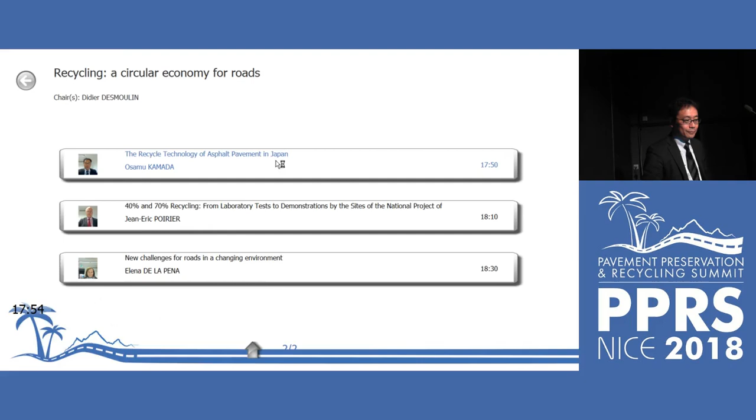Thank you, Mr. Chairman. I'll be talking about recycled technology of asphalt pavement in Japan.

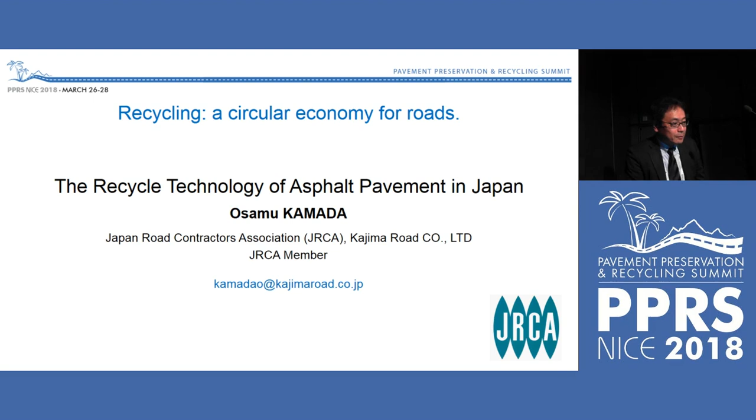In this presentation, as introduction, I'm going to talk about the state of Japanese asphalt pavement recycled technology. I will then show you the represented asphalt plants in Japan, then a mix design method of recycled asphalt mixture that is established and generally used in Japan, then recycled materials of base course. Finally, I'll give a brief conclusion and future work.

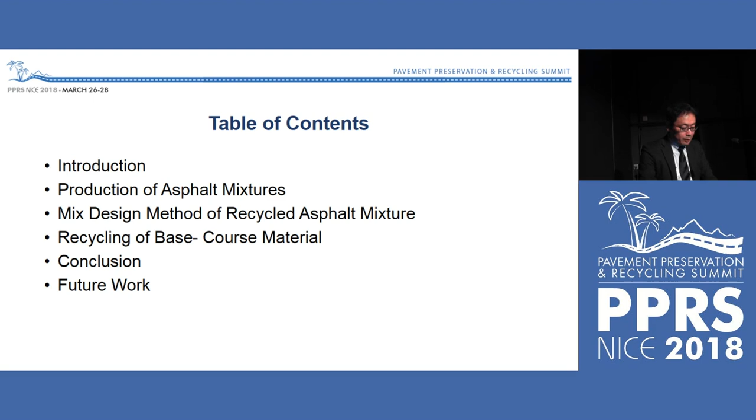First, let me mention the current situation of today's Japanese asphalt pavement recycled technology. The recycle ratio of asphalt mixture reached 99.5% in 2012. In the past, waste asphalt mixtures were often used as base course materials. At present, the mixing ratio of RAP used for dense graded asphalt mixture has increased. More than 60% of waste asphalt mixtures are used for asphalt mixtures containing RAP.

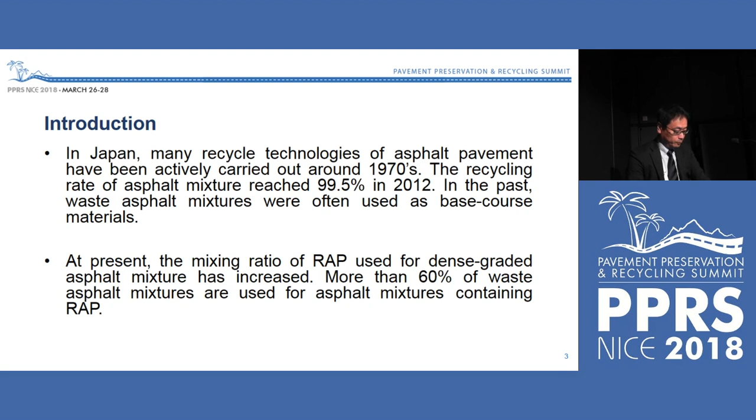What you see here is the production of virgin and recycled asphalt mixture in recent years in Japan. You can see the ratio of recycled mixtures to the total proportion of asphalt mixtures has been increasing. The ratio was only 14% in 1992, but it exceeded 50% in 1998, and reached 76% in 2016. The recycled asphalt mixture has already been used as a general mixture in Japan.

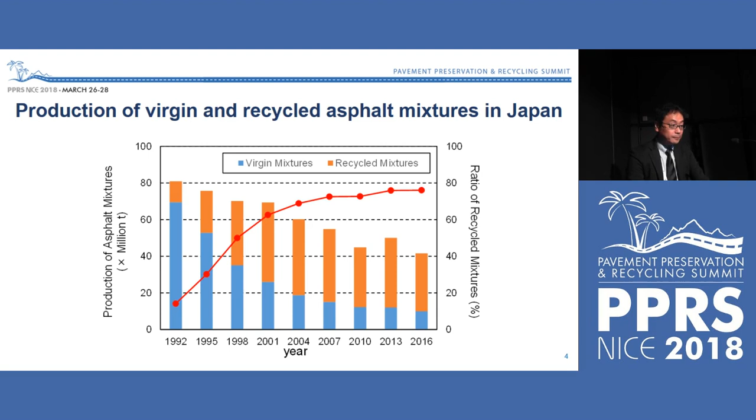What you see here is the mixing ratio of RAP in recycled asphalt mixture in 2016. The ratio is different among the areas. It is the smallest in the Hokuriku region, at 38.9%. The nationwide average is 50.7%.

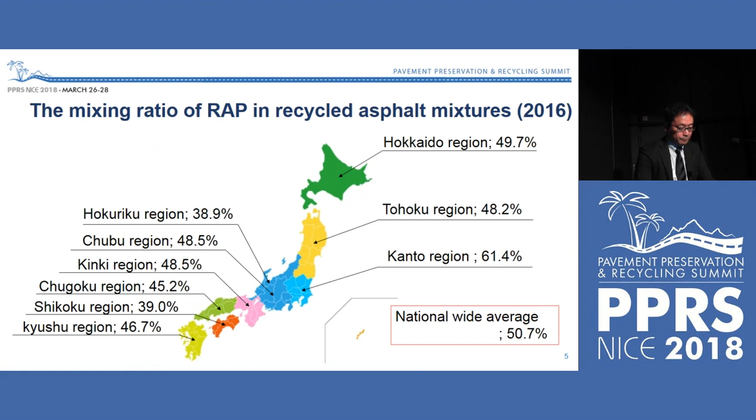The ratio is the largest in the Kanto region, at 61.4%. The ratio of the Tokyo and surrounding area, which is in the Kanto region and consists of Tokyo Metropolis, Saitama Prefecture, Kanagawa Prefecture, and Chiba Prefecture, is even higher, reaching 69.1%. You can see that more RAP is used in the metropolitan area.

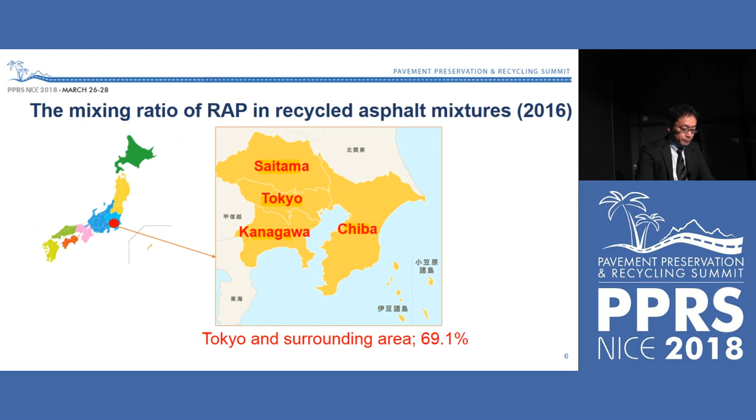I'm going to talk about Japanese asphalt plants. The number of Japanese asphalt plants is about 1,000, and around 90% of them can produce recycled materials. Most of them are batch type, and manufacturing capacity is mostly between 45 and 120 tons per hour. Japanese asphalt plants can be divided into three types: drum dryer method, parallel heating method, and indirect heating method.

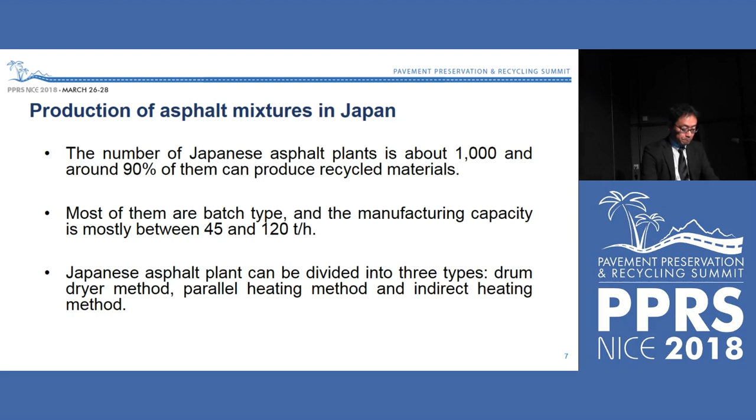Let me mention the outline of the parallel heating method and the drum dryer method. An illustration of the parallel heating method is shown on the left. The parallel heating method is the most commonly used type, approximately 70% of all. This method uses a separate dryer and drum for RAP and virgin aggregates, and a separate drum for drying and heating RAP. This method can eliminate the moisture of RAP and heat it without thermal degradation. For this type, the mixing ratio of RAP used for dense graded asphalt mixture reaches between about 30% and 60%.

An illustration of the drum dryer method is shown on the right. This method mixes RAP and virgin aggregates in the same dryer. The drum dryer method is the most capable of increasing the ratio of RAP in the recycled asphalt mixture. For this type, the ratio of RAP can reach 60% or more. It's mainly used in the Tokyo metropolitan area, but it's used in only about 10% of all plants.

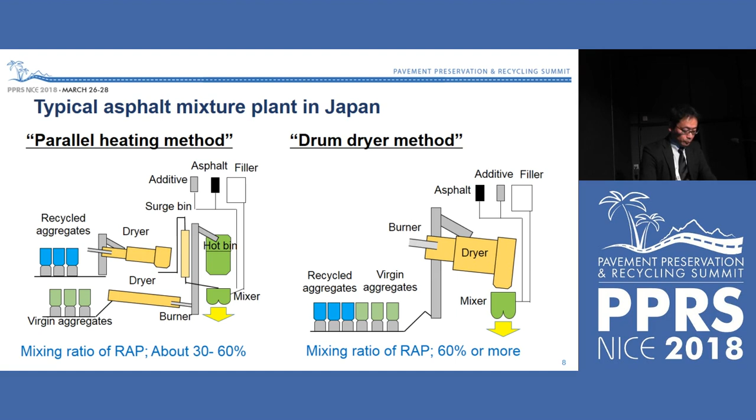I'm going to talk about the mix design method of recycled asphalt mixture. The Japan Road Association issued the Manual of Pavement Recycling in 2004 and established the design method for recycled asphalt mixture. What you see is the procedure of mix design of the recycled asphalt mixture.

First, RAP is collected and subjected to material tests to determine whether it can be used as recycled aggregate. Then the amount of rejuvenator or virgin binder and the mixing ratio of RAP are determined. In addition, the provisional blend asphalt content, which is the central value when conducting the Marshall stability test, is determined. Finally, for the mixture determined by the aforementioned conditions, the Marshall stability test is conducted in the same manner as for a virgin asphalt mixture, and the optimal asphalt content is determined.

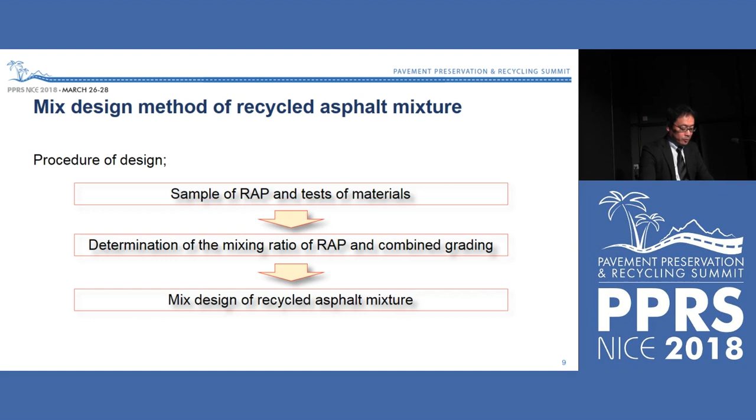Let me mention about sampling of RAP and criteria of materials.

The representative RAP and virgin aggregates are sampled from storage. The extraction test and the recovery test of RAP, classified by predetermined particle size, are conducted. And the aggregate particle size and penetration, or

an indirect tensile coefficient are then measured. To use RAP in recycled asphalt mixture, RAP needs to satisfy the criteria of this table. The evaluation method of indirect tensile coefficient has been developed in recent years to use more RAP containing modified asphalt.

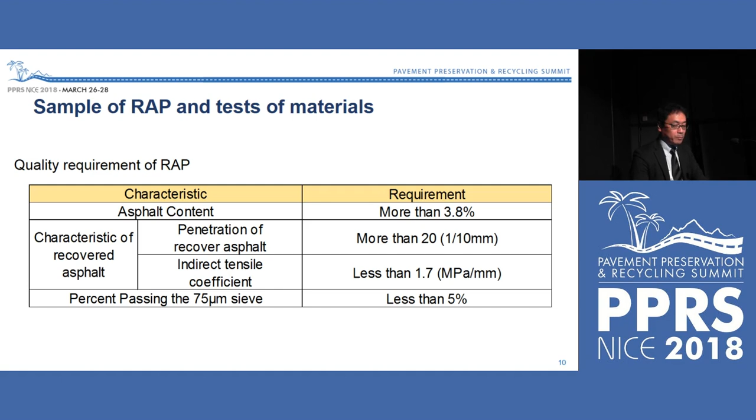Indirect coefficient is measured by the indirect test shown in this figure. Specimens of 100% RAP are compacted and tested by the indirect tensile strength test at 20 degrees. The load speed is 50 millimeters per hour, and it measures peak load and displacement at the time when the specimen is fractured.

The indirect coefficient can be calculated by dividing the indirect tensile strength by the amount of displacement. The indirect tensile strength can be calculated by this formula.

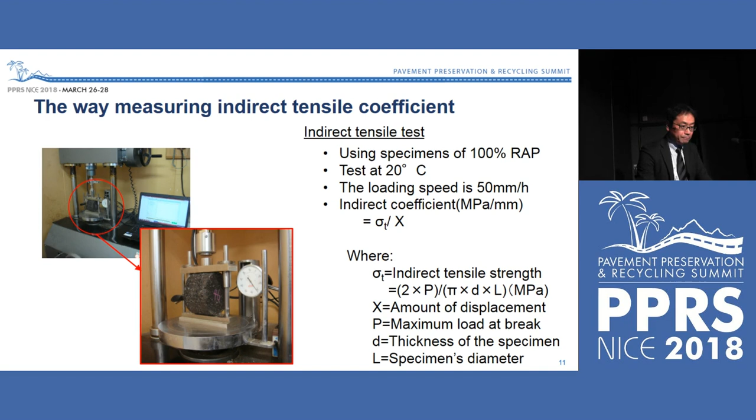Let me mention about determining the mixing ratio of RAP and combined grading. Combined grading is required to adjust the mixing ratio of RAP, and the amount of additive is investigated to satisfy the quality criteria of the recycled asphalt mixture.

Virgin asphalt and rejuvenators have been used as additives. New rejuvenators are now more commonly used.

The penetration or the indirect tensile coefficient have been used to determine the target design performance of the recycled asphalt mixture.

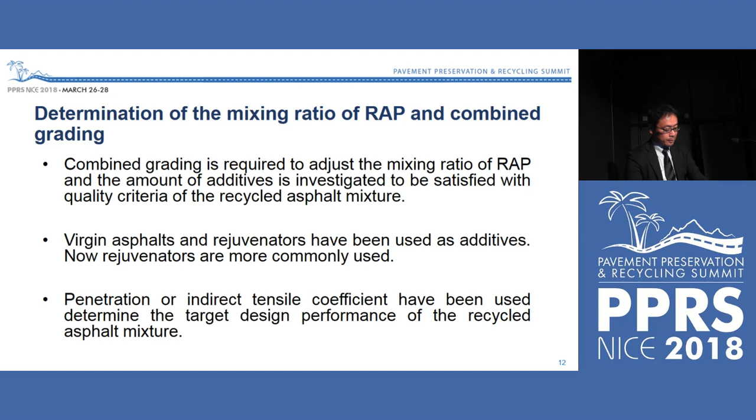This table shows the target value of recycled asphalt mixture. In general area, the target value of penetration is between 40 and 60. The target value of indirect tensile coefficient is between 0.6 and 0.9.

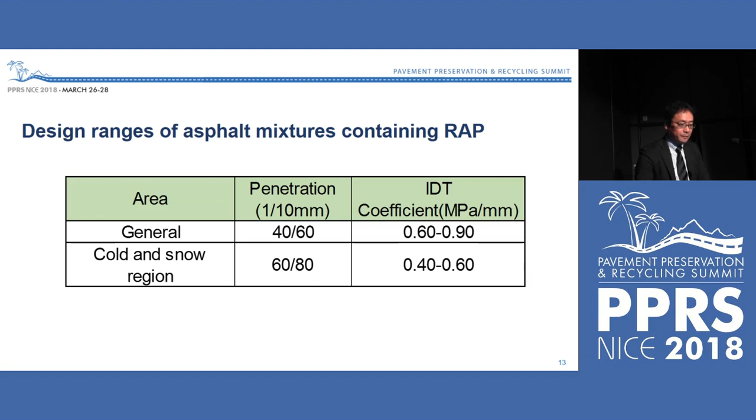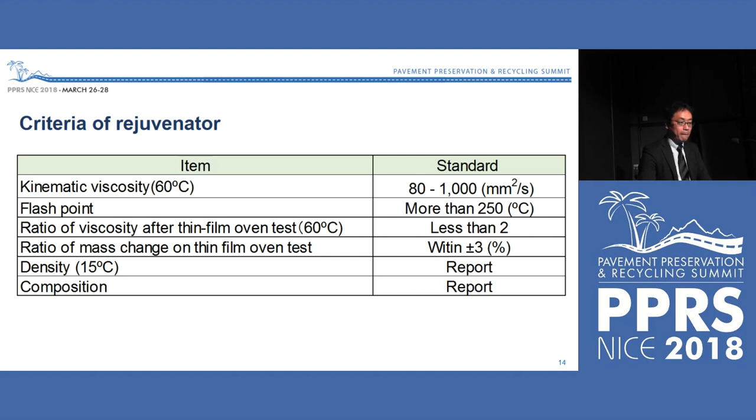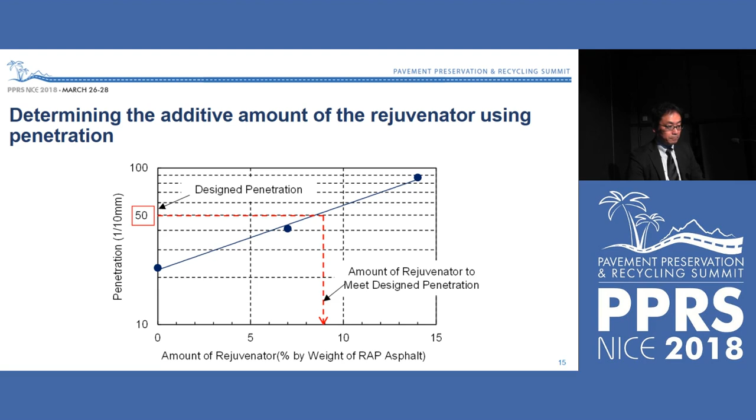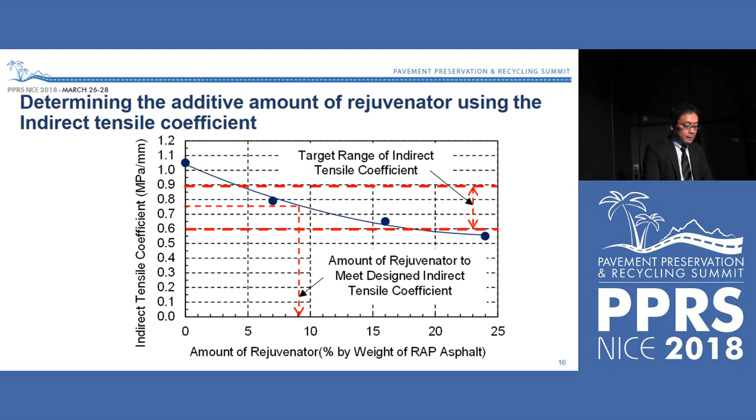Afterwards, the Marshall stability test is conducted. I'm going to explain the mix design method of recycled asphalt mixtures.

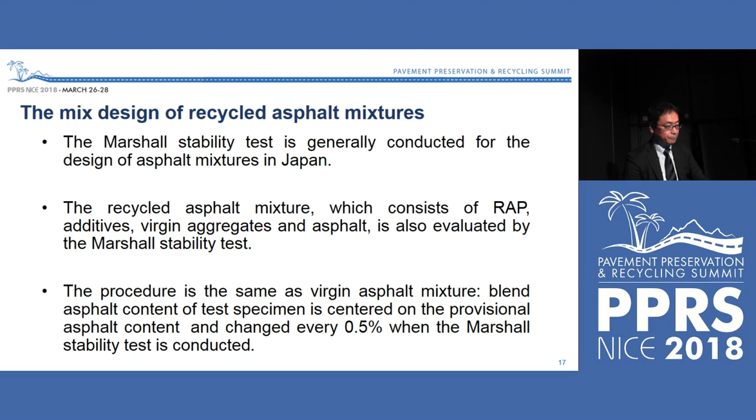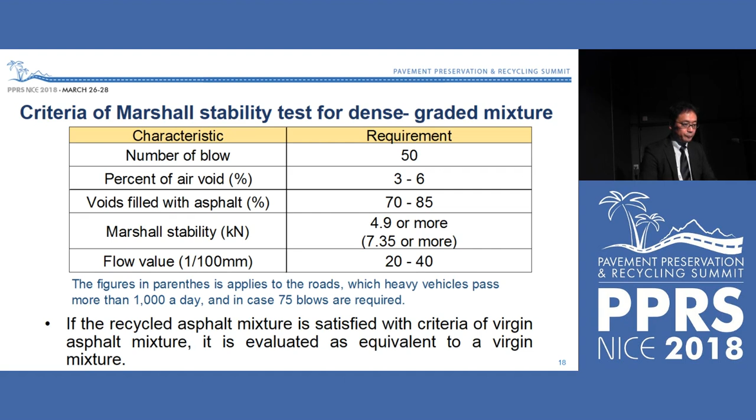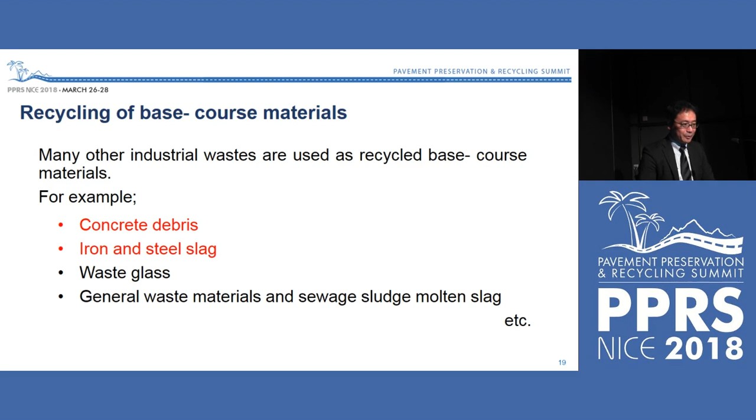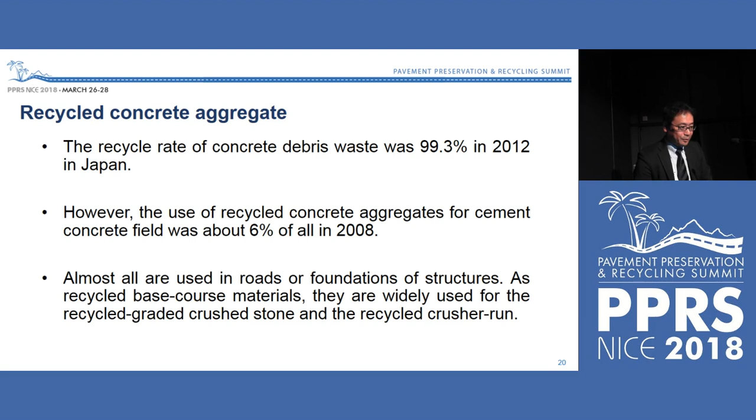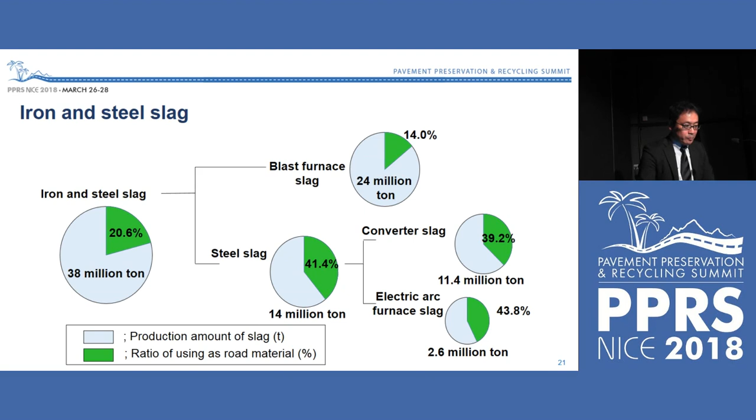Base course materials, recycled base course materials in Japan. Let me mention iron and steel slag. Iron and steel slag used in road materials was 20.6%. Okay. Thank you very much.